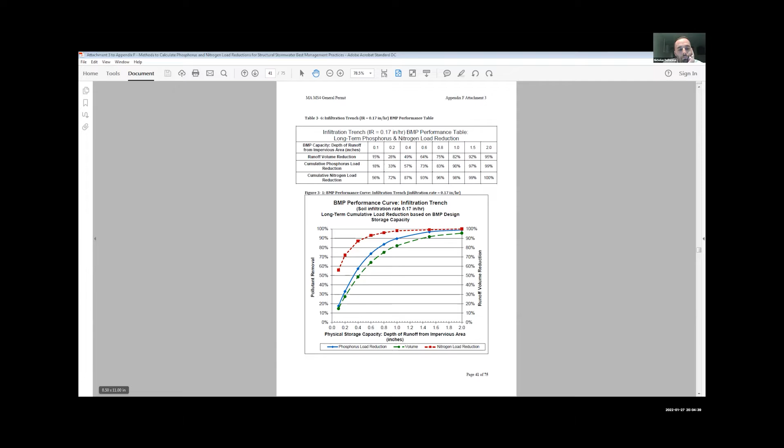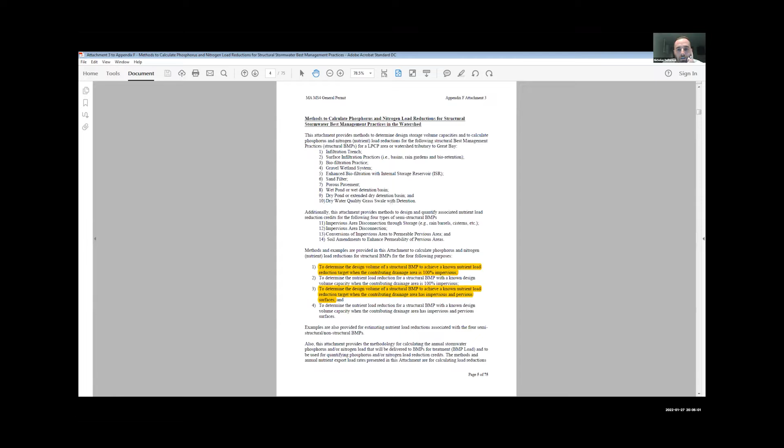I copied those tables onto our Excel file. Yeah, so you put them in the stormwater report, because I'm looking at it, right? That's where I got the number. I did. And so this whole PDF, this is in attachment 3 to Appendix F. You can find this online. It's provided by the EPA, and it goes through the whole process of how to calculate the nutrient load reduction for any given site. So these are the loading numbers.

Okay. If it's a commercial industrial use, direct connected impervious, you're going to have a nitrogen load of 15 pounds per acre per year. So you would multiply that number times the area for that given use and cover type. If you have pervious surfaces, you're going to use these numbers based on the soil type, A, B, C, D soils. Right. And that's how those loads are generated.

So right now we have a commercial industrial existing use, multiplied the area of the site, did all the takeoffs for impervious versus pervious cover to come up with that nutrient load. And that's the existing load. There's minimal treatment out there right now. It all just goes off into the resource areas. Right. And then we came back and established a proposed load based on all residential use, broke that up into impervious versus pervious surfaces. So that would be the load without any treatment.

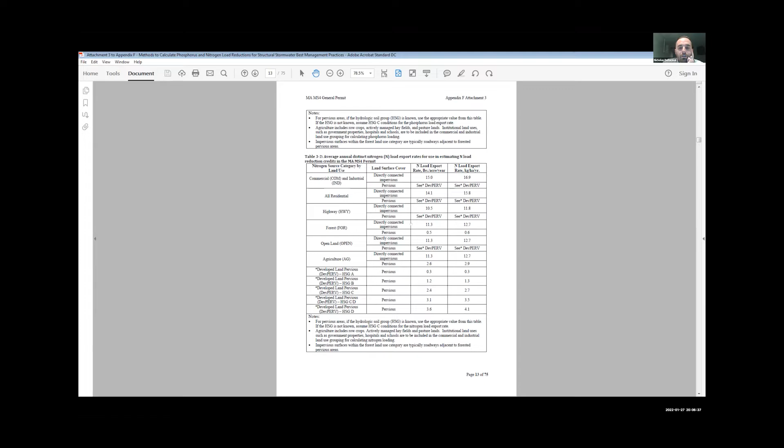Okay, but you're assuming because the buildings and the pavement wouldn't enter into it, or? Well, no, you've got to first establish the load. So once you know the loading that would take place just based off the change in use, imagine if we didn't put any BMPs on site, you establish that load, and then you go and design your stormwater management system, and you use these charts. Wait a minute, is all that you just scrolled through the method that you use?

Do I have that in this report? No, this is provided by the EPA. This is just a guideline. Can you just send me that guideline to Rebecca or something? I can look at it later. Sure. See, the thing I'm concerned about is that these are like numbers that we're not sure we're even gonna attain, right?

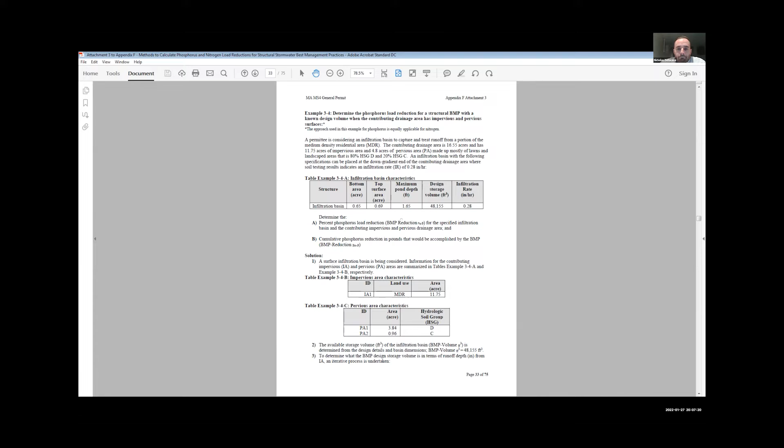In reality, I mean, we are striving to reduce the pollutant intake into the lake. That's a primary objective. And this seems like we're just satisfying a number. Well, this is the way you design it. It's based off of research. I know, but I don't see where you really can say that you have actually reduced it, unless you tested the water. Do you see what I'm saying? Yeah, no, I completely agree. That's the only way to know for sure and to know exactly how much.

And I'm thinking too, in the future, if this project changes, someone might have a different idea of what's beautiful around this lake and decide to fill in all those or pull all the plants out of those basins. And then what have we done to our pollutant loading? I worry about that. Yeah, I see what you're saying, but there's a million things that could happen. No, I know, but practically speaking, you could probably condition it upon that the plantings need to be in there that are provided on our proposed drawings. Well, yeah, and they have to be maintained. If the plant dies, you've got to replace it.

I didn't know if you took this set amount of plant material and could assume that you get X amount of phosphorus or nitrogen removal. And then you figured out how many plants you needed to do that. And that's how you get your planting scheme. But that's evidently not the way it works. No, so this is a chart that shows it's kind of lumped in.

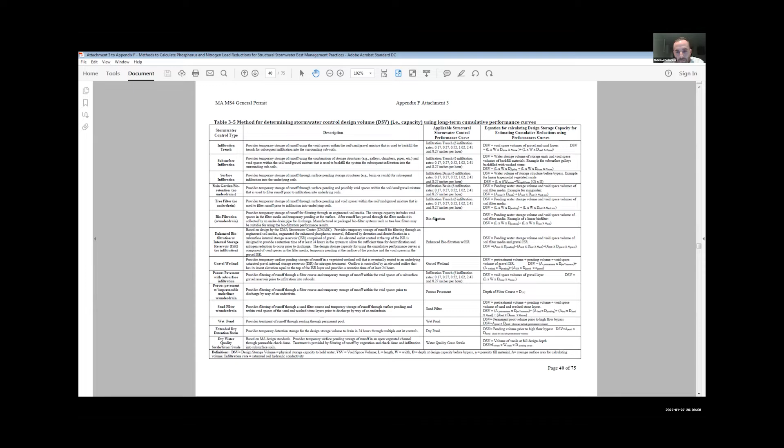So if you're using a subsurface infiltration, they tell you to use the chart for infiltration trench. If you're using bioretention, they have you use the biofiltration chart, and these are the different charts. And so the plantings that are required in each of these BMPs are outlined in the Mass DEP handbook. Yeah, I saw that. So this is kind of building off of that. They're assuming that you're already constructing your... Right.

BMP correctly. And if they tell you what plants you should be putting in there, there's like 3 pages full of plants that can go in. And I'm assuming that your landscaping people are consulting that list to figure out what plants are going to go in there or what would be best in there, right? Yep, that's correct.

Well, let me ask you something else. I noticed when reading the stormwater management for the 2 methods that you're using, I think one was wet basins and the other was bioretention areas. So the wet basins, they were talking about a very deep hole, like at least 1.5 to 2 meters deep. But they also mentioned that they had shallow methods. So which method would you say that you're using? Because some of them seem like they're going to be in the water table. That's why I was questioning the water table elevation.

They're designed to be in the water table by design. But the wet basins are open water and they're vegetated along the banks. Is that correct? Can you repeat that? Sorry. The wet basins, yeah, they're designed to have standing water in them, that's correct. So, but they are talking about depths that put you in the groundwater. Yes. Okay, unless you have another method, which I think they were hinting at in the regulations, but they really didn't go into detail about it. Maybe you're using a different method.

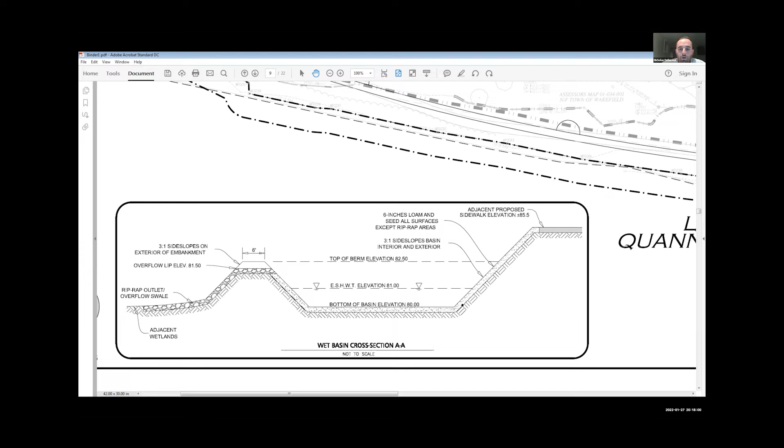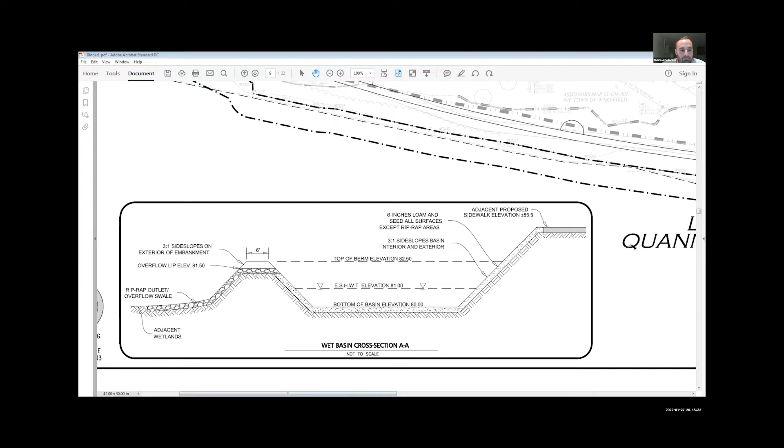But are you calling this a wet basin? It's not really a wet basin though, right? Because it doesn't go along with the regulations, does it? No, it's a hybrid approach to a wet basin. Okay. And we're taking reduced credit for these wet basins around the Parkway. Well, how much is the reduction, and from what? Based on the EPA calculation. So I can find, just bear with me for 1 second.

I'm gonna pull up a peer review memo from the town engineer, Bill. If it's Bill's peer review, I've already read it. Yeah, and we discussed this exact topic. But that doesn't mean that there wouldn't be more questions. That's why we're having a hearing. Yep, and I'm trying to answer that question.

Because you label these different things on your plans. You don't call them the same thing. Well, they're not all the same thing. That's what's getting confusing, because I don't know which one is supposed to be best management practice. Aren't they all best management practices that you're using? Yeah, they're all best management practices. The chambers are a best management practice, the bioretention is, the infiltration basin is, and the wet basin. Okay. But they don't match up with what they're saying they should look like. This is not the correct one.

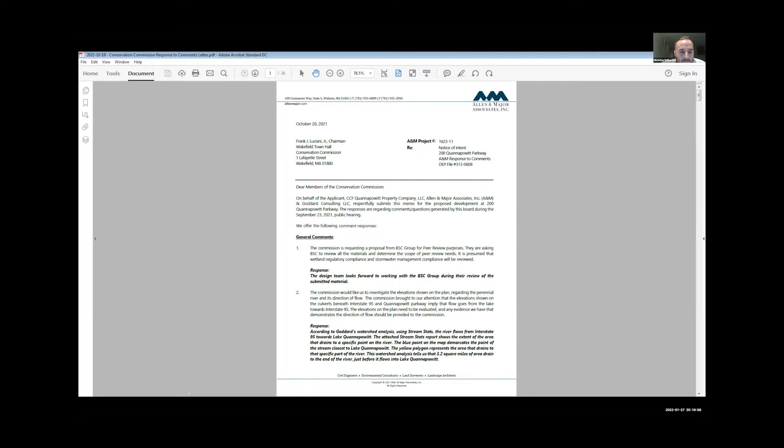Is there a sediment forebay prior to the wet basin? Oh, that was my next question. Yes. Why can't I find this? We had asked a while ago if you had a site that we could look at that you've done all this type of stuff on. You had said there's a lot of sites that you've done. So could you get us a site that we could look at, close by maybe, so that we could see what to expect? Yep, I have that as well. If you just do one question at a time.

I got another question when you get a chance. Okay, so here we go. 0428. Can you see this? Yes. All right, so as far as the wet basins not meeting the exact requirements of the handbook, the reason is the space constraints between the Parkway and the resource areas. This is the comment from Bill Renault's office. He says, none of the proposed wet basins meet the requirements in the Mass Stormwater Handbook, but it is understood that this is a redevelopment aiming to treat stormwater runoff to the maximum extent practicable. Yeah.

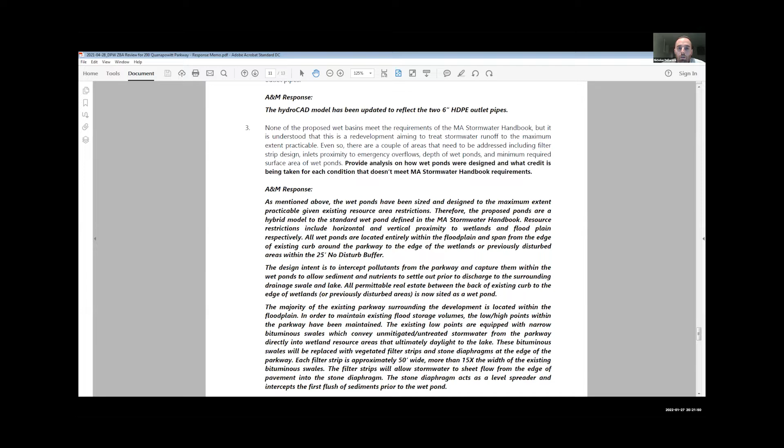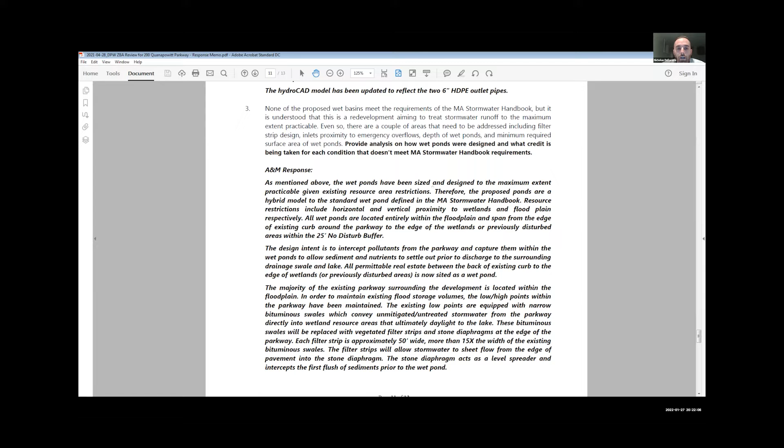Even so, there's a couple areas that need to be addressed, including filter strip design, inlet proximity to emergency overflows, depth of wet ponds, and minimum required surface area of wet ponds. Provide analysis on how wet ponds were designed and what credit is being taken for each condition that doesn't meet Mass Stormwater Handbook requirements. And I don't know if you've seen this response memo before. This was actually provided during the ZBA process.

But we responded, the wet basins have been sized and designed to the maximum extent practicable given existing resource area restrictions. Therefore, the proposed ponds are a hybrid model to the standard wet pond defined by the Mass Handbook. Resource restrictions include horizontal and vertical proximity to wetlands and floodplains respectively. All wet ponds are located entirely within the floodplain and span from edge of existing curb around the parkway to the edge of the wetlands or previously disturbed area within the 25-foot no disturb.

The design and intent is to intercept pollutants from the parkway and capture them within the wet ponds to allow sediment and nutrients to settle out prior to discharge to the surrounding drainage swale and lake. All permittable real estate between the back of existing curb to the edge of the wetlands or previously disturbed areas is now sited as a wet pond. The majority of the existing parkway surrounding the development is located within the floodplain. In order to maintain existing flood storage volumes, the low high points within the parkway have been maintained.

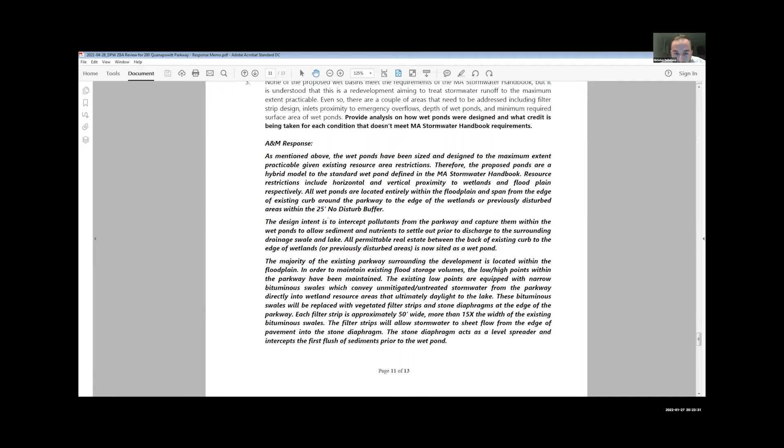Let me kind of skim through. Let's see. Strips. Okay, the next page has the breakdown.

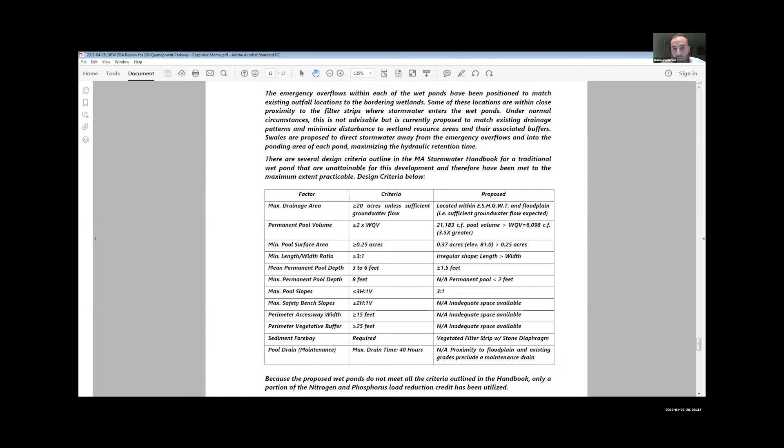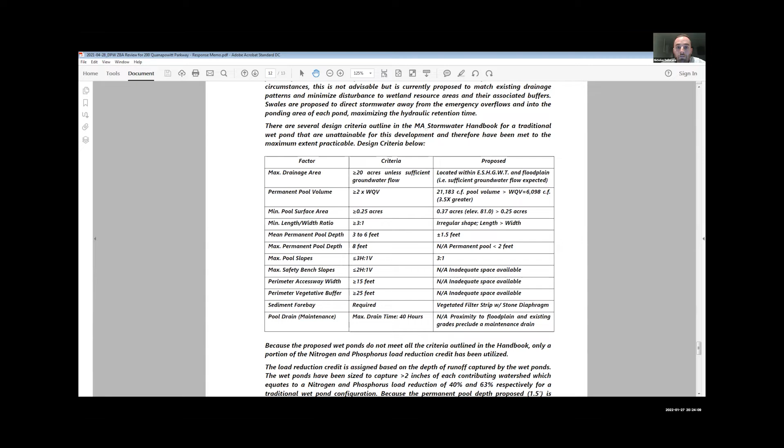The emergency overflows within each of the wet ponds have been positioned to match existing outfall locations to the bordering wetlands. Some of these locations are within close proximity to the filter strips where stormwater enters the wet ponds. Under normal circumstances, this is not advisable, but it is currently proposed to match existing drainage patterns and minimize disturbance to wetland resource areas and their associated buffers. Swales are proposed to direct stormwater away from the emergency overflows and into the ponding area of each pond, maximizing the hydraulic retention time.

There are several design criteria outlined in the Mass Stormwater Handbook for a traditional wet pond that are unattainable for this development and therefore have been met to the maximum extent practicable. And that was that table you saw in the handbook earlier. We were kind of flipping through those pages. There was a table there. Yeah. This is that exact table. We just copied it over and I went through the criteria and then what's actually being proposed.

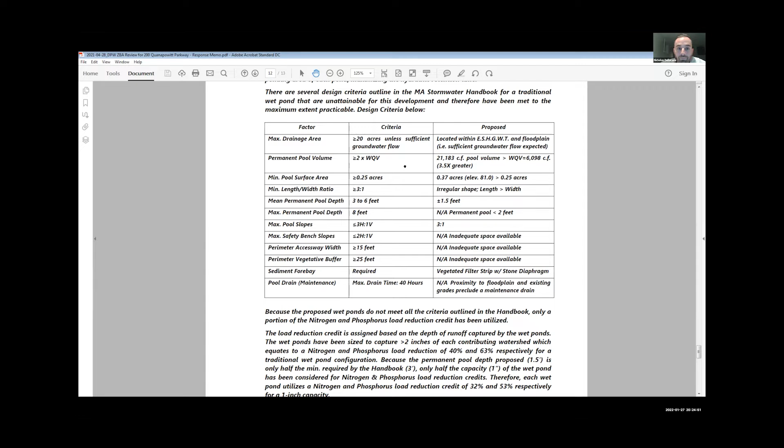So max drainage area, handbook requires greater than 20 acres unless sufficient groundwater flow. We're proposing the wet basins, they're located within the seasonal high groundwater and the floodplain, i.e. sufficient groundwater flow expected. Permanent pool volume greater than 2 times the water quality volume is required. We have a 21,000 cubic foot pool volume, which is greater than the water quality volume, which is only around 6,000 cubic feet. So it's 3.5 times greater. So it well meets that standard.

Minimum pool surface area, greater than 1/4 acre. We have about 0.37 acres, which obviously meets that requirement. Minimum length to width ratio, greater than 3 to 1. We obviously have irregular shapes, but the length of these is greater than the width. Mean permanent pool depth, 3 to 6 feet. We're only proposing 1.5 feet, given the space constraints and how quickly we can grade that slope down. Max permanent pool depth, 8 feet. Obviously, we don't have that issue because we're not even close to 8 feet.

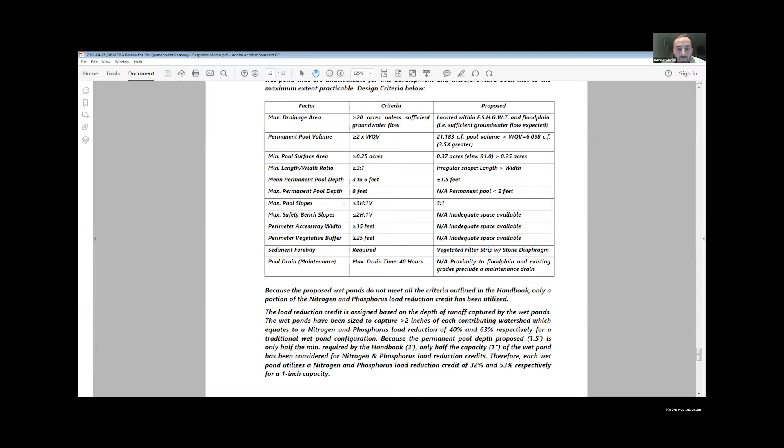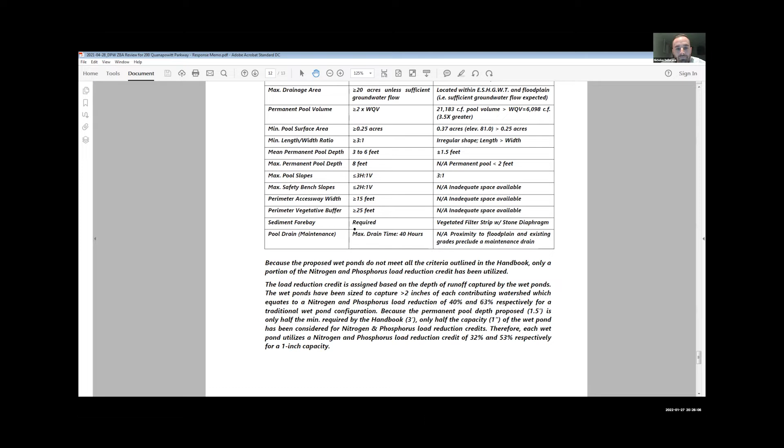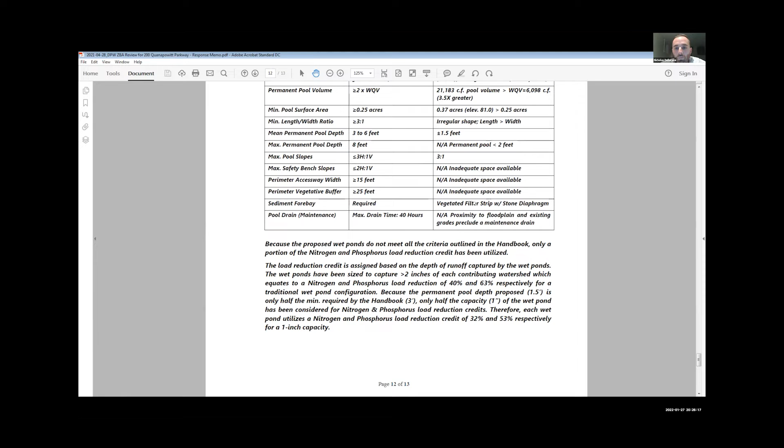Max pool slopes, 3 to 1. We're proposing 3 to 1. Max safety bench, 2 to 1. Not applicable. We don't have enough space. Same with the perimeter access way and perimeter vegetated buffer. We just don't have the space between the edge of the parkway and the wetlands. As for the sediment forebay, it is required. This was an old memo. We were proposing the vegetated filter strips with the stone diaphragm, where we now have sediment forebays at all but one of the wet basins.

Pool drain, max drain time 40 hours. It's not applicable. And this is where we get into what sort of reductions in credits we're taking based on the EPA's calculations. So because the proposed wet ponds do not meet all the criteria outlined in the handbook, only a portion of the nitrogen and phosphorus load reduction credit has been utilized.

The load reduction credit is assigned based on the depth of runoff captured by the wet ponds. The wet ponds have been sized to capture greater than 2 inches of each contributing watershed, which equates to a nitrogen and phosphorus load reduction of 40% and 63% respectively for a traditional wet pond configuration.

Because the permanent pool depth proposed, 1.5 feet, is only half the minimum required by the handbook, which is 3 feet, only half the capacity, 1 inch, of the wet pond has been considered for nitrogen and phosphorus load reduction credits. Therefore, each wet pond utilizes a nitrogen and phosphorus load reduction credit of 32% and 53% respectively for a 1 inch capacity. Now you might say 32 isn't half of 40 and 53 isn't half of 63. But if you look at

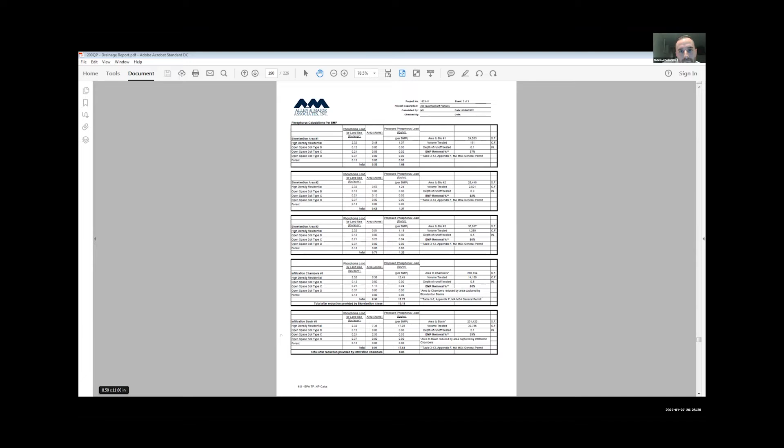To find the drainage report. Let me share this. This goes back into, oh, sorry, actually, it's on this sheet. They're not in there. Okay, but aren't you really getting these? I mean, you've modified every standard out there to make this thing fit. So I don't know what to say about that. Let me show you. Let me just finish this sentence real quick.

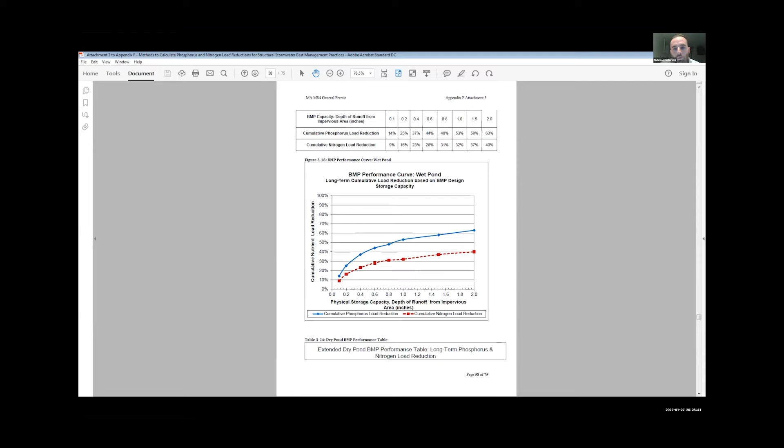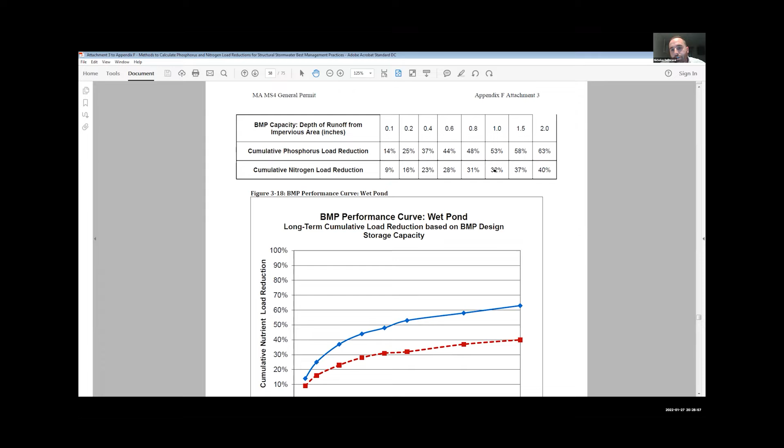So here's your wet pond. So we sized these ponds to hold a 2-inch volume, which gives you the 63 and the 40%. We're only taking half the credit, so 1 inch. So if you hold 1 inch, you get 53 and 32% reduction. That's where those numbers come from. Okay.

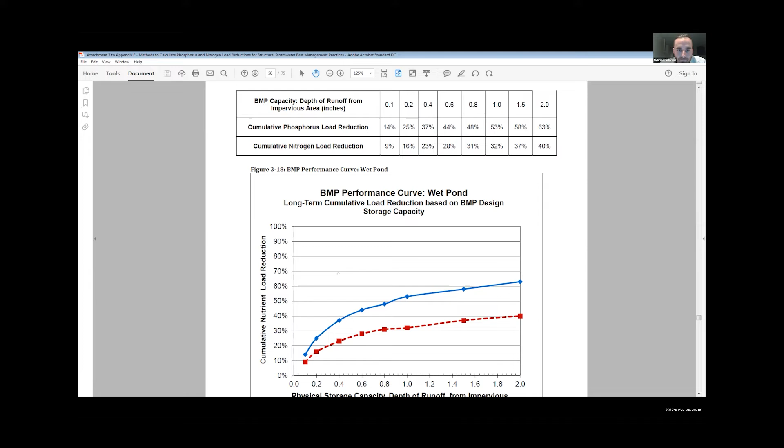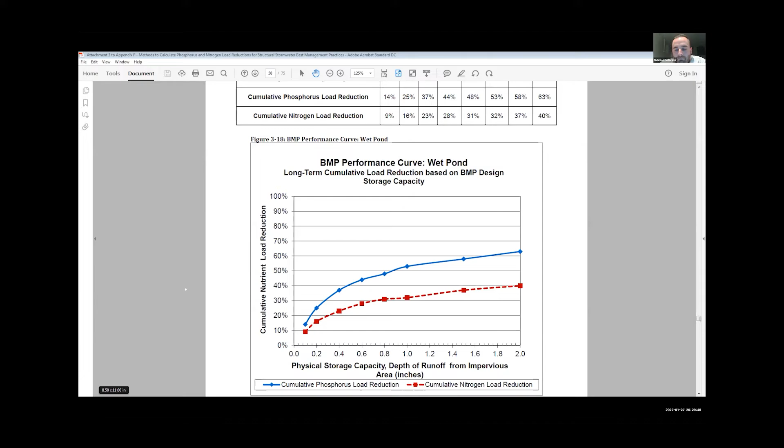But let me ask you something. If you made them smaller, could you stay further away from the wetland and still meet these requirements? I mean, you're right out to the limit everywhere you could go, everywhere around the building. I understand why you're doing that, but if there was a way to stay further away from the wetland with your alterations, could it be achieved?

In some locations, I suppose you could make them smaller, but then they're pretty small at this point. So you're not really getting much treatment, and what is really the purpose of them at that point? Then you're better off just letting it dump right into the wetlands as it does today with no treatment, and you're gonna get all that sediment into the resource areas.

Wouldn't it just mean that there might be a little bit more volume in the retention areas than you would have had? You mean in the chambers and the infiltration basin? Not so much the chambers, but the wet basins in front of the building. This is all wet basin in front of the building, correct? It's an infiltration basin. It's meant to be dry and infiltrate. Is that getting planted with vegetation along the banks? Yes, we went over all the landscaping at a previous hearing. Ian Ramey from Copley Wolff went into in-depth discussion on the planting plan for the entire site.

But my point is, you can't get the water from the Parkway over here. The elevations don't work. That's the whole reason for constructing these wet basins. They only handle runoff from the Parkway because the Parkway is within a floodplain. You can't raise the Parkway to get it to drain anywhere else, or you're filling the floodplain without any compensatory flood storage. The only mitigation you can propose here are these wet ponds at the backside of the Parkway.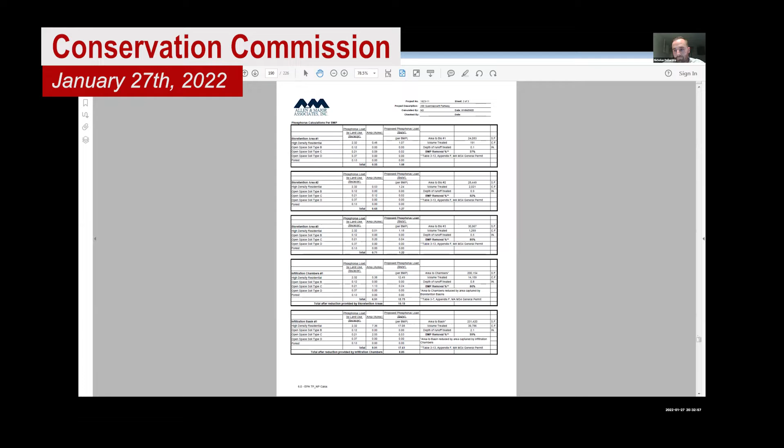And you've got a drainage area in there. What are you doing to maximize the discharge points that are existing so that we have the same volume of water heading into these areas? Because that's a wetland over there. I'm sure if I studied this thing, you've got pipes and manholes and stuff like that everywhere. It would tell me, but are we taking water away from there that might affect the wetland's ability to sustain itself?

Nope. So right now, all of the runoff that comes from the existing site ponds in this back corner, like everyone's aware of. There's a little overflow in here that goes into that back swale. That back swale fills up and it goes counterclockwise around the site. It doesn't reach this wetland.

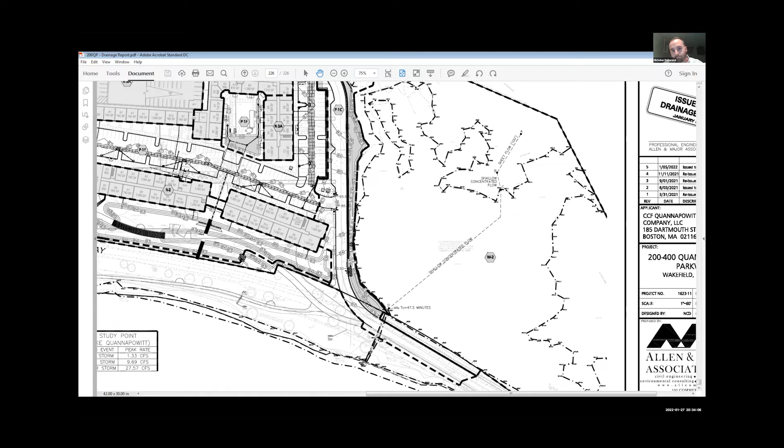I know that. But that is a wetland as it runs along the line of the building. That's a wetland there, isn't it? Right here, this is a wetland. No, go up to the top of the page, I can't show you on mine. Yeah, right in that area there. Isn't that a wetland that's running along the fence parallel to the highway? Yes. Okay, so the water that comes out of this area goes down, like you said, flows along the building.

You've got this one, this is the proposed drainage areas, right? Yes, this map that you're showing. So on the existing, it shows a big area in here that feeds this one spot where it goes along the building. Have you tried to maintain that somewhat? So does this drainage area that you're showing now represent the same volume that would go to it in the existing conditions?

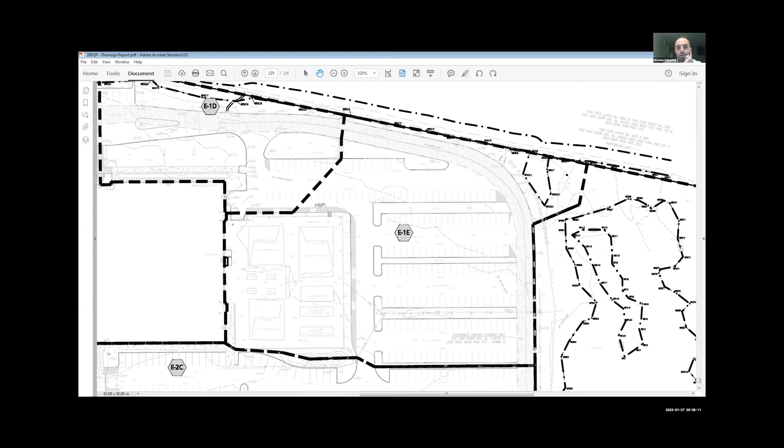No, it's being reduced because it's being captured on site and infiltrated into the groundwater. Okay, but is that a good thing to do? Yes, you're treating it and putting it into the groundwater rather than letting it discharge directly overland into the wetland, carrying all the pollutants. Well, where does that area that you're showing me now discharge to?

So within the Parkway, there's a high point right where my cursor is here. It climbs up to the driveway entrance, and then it goes back down. All of that goes into a vegetated filter strip right here. This is the one vegetated filter strip that we have on site, mainly because we don't have room to provide a sediment forebay in this area. So water goes into this filter strip, comes into the wet basin, and fills up all the way into the back here. Eventually it'll reach about 6-inch to 12-inch ponding depth and overflow as it does today into the drainage swale.

Okay, so if you're trying to match volumes going into these certain areas, how close would you say you are between the existing and the proposed drainage areas for that location? You know what I mean? I'm saying that you showed me how the street goes down, and when it gets to this vegetated area, it goes into the brook along the highway chain link fence, right? Yep. So you've got another wet basin here that's parallel to the building. That water goes into it as well? That goes into this one vegetated area, this triangular piece that you said you couldn't put a forebay. Yeah, it's actually over to your right.

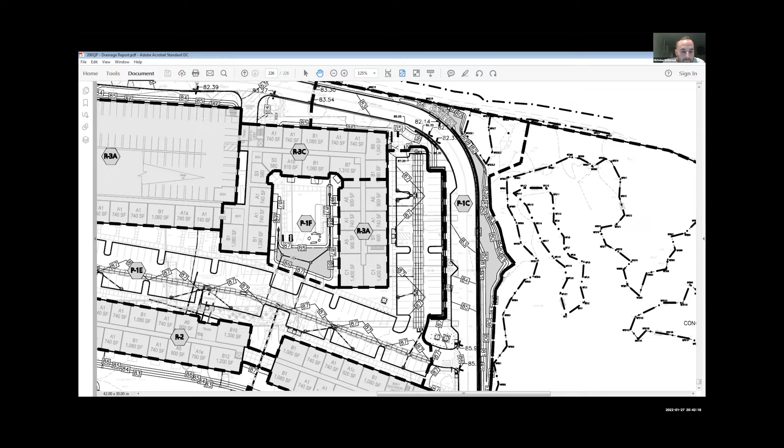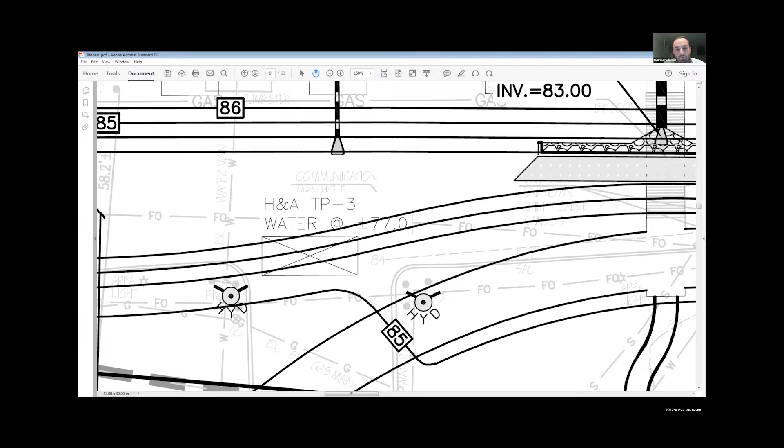Can you show the locations of the test pits on the site plan? Yep. Let me pull it up. Can you see my screen? Yes. So there's a test pit here, it's blocked off by the text. There's one performed here, the H&A. There's test pits here, H&A TP3; for instance, they established the seasonal high water at 77 at this location. Like I had said, there were a couple that were much lower.

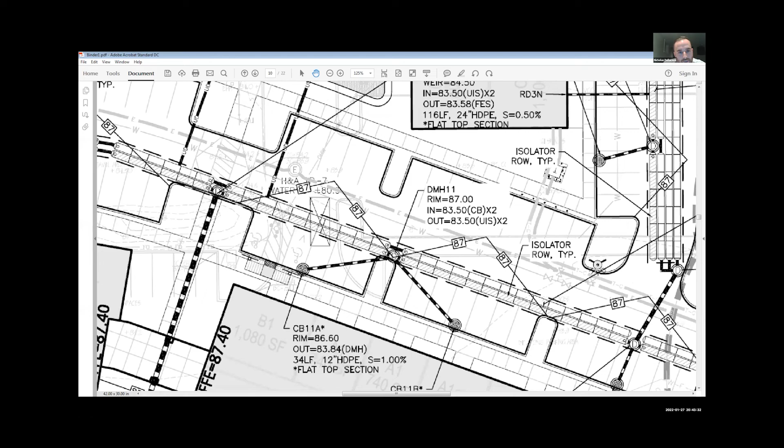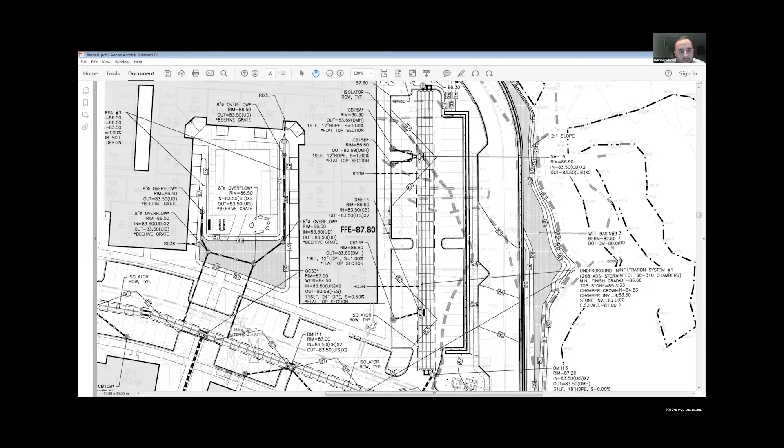Go to the next sheet. H&A TP5, water at 80.2. This isn't the one, but this is TP6 at 80.1. There's H&A TP7 at 80.3. There should be another one up here. I think it falls underneath the building. Those are some of them. There's another one, TP4. So you can see they were done all the way throughout where we're proposing the infiltration on the site.

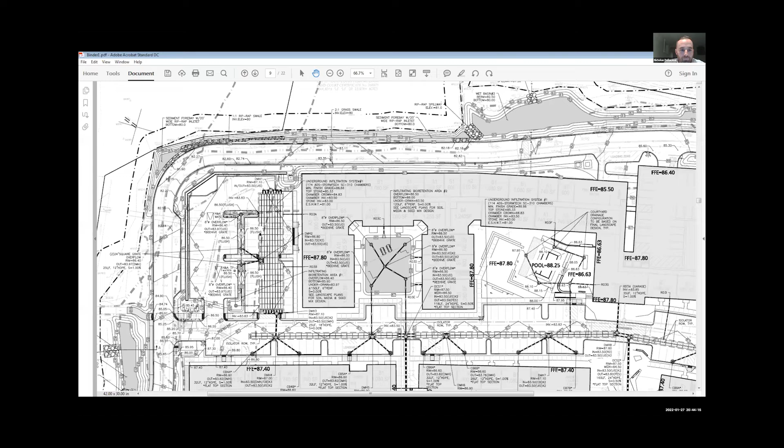That brings me to another question. Do you know which way the groundwater is flowing from your property? The groundwater itself? I don't know the answer to that question. I would assume it flows towards the lake. It could be towards that no-name stream as well. We haven't performed any sort of groundwater migration analysis. Okay.

Another question I have for you is, all of these wet basins get vegetated, right? Correct. And some of them now you're saying are not deep, maybe 1.5 feet deep, something along those lines. Is that correct?

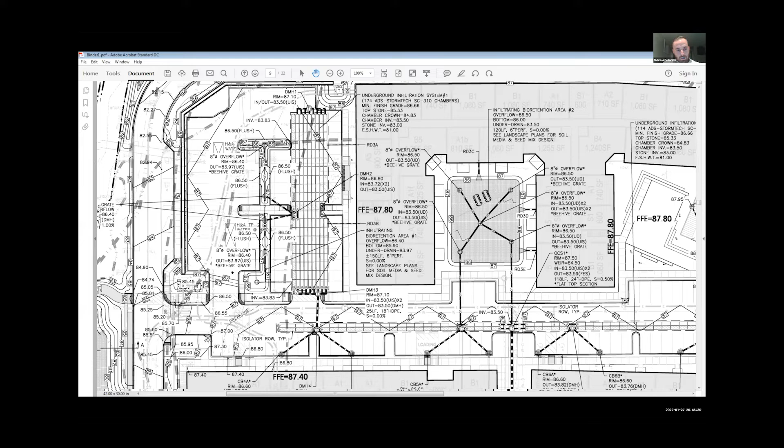These wet basins. Yes. Okay. So how do you, and they're at different elevations, right? I mean, some are down low, some are up high. The wet basins, yep, they're all pretty much around the same elevation. Bottom of this one's at 80. Berm's at 82.5. We have this one at 80, berm's at 82.5. They should all be right around the same elevation.

80, okay. 82.5. So in times of drought or stuff like that, do you need to provide water to these plants that are down there? Because you're well above the, I mean, what'd you say was the 100-year flood elevation? 83? 81 was the established seasonal high water. Oh, that's the groundwater high. What's the flood elevation? 83, right? 83. 83 and 81. So if you're at 81 and all your plants are at and the groundwater is at 81.

I guess my question would be, do you have to supplement these areas with water at dry times to keep the plants alive, or will they survive anyways? No, so there's no significant plant vegetation proposed in the bottom of the basin where there's going to be standing water. No, but there would be up on the banks, right? Yeah, I believe Copley Wolff is proposing some whips in there along the banks. Right.

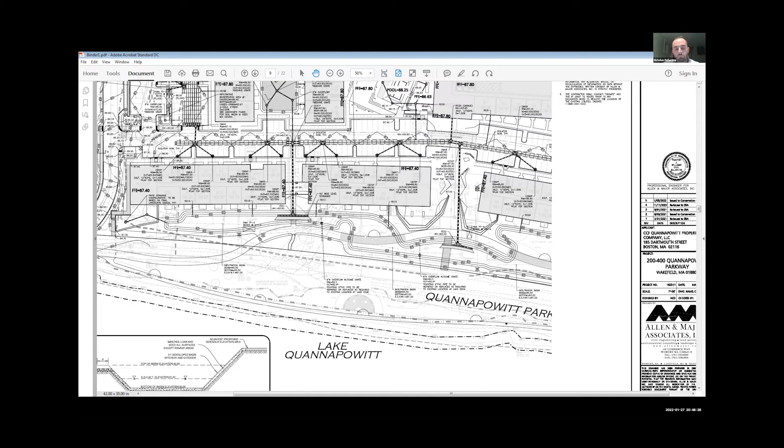Can never hurt. If the bottoms of these basins, like the ones on the Quannapowitt side of the building, are they just gonna be mulched? Which basins are we talking about? This basin in the back? Stop moving your hand there, actually, you're in the right spot. Those there. So the bottom of those is what, 81.5? No. These are infiltration basins. They're at 83. They're above the groundwater table. They're meant to be dry, and these will have plantings in them. Okay. So the whole bottoms of those are gonna be planted. I'm trying to visualize what this is gonna look like when it's completed. Are these high plants like grasses?

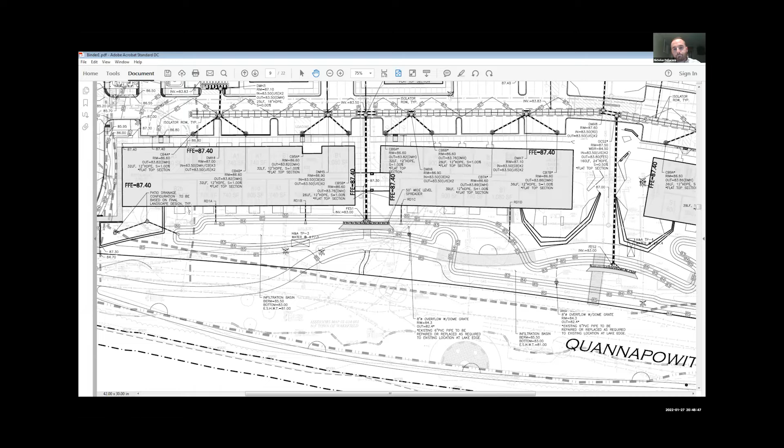Yeah, Copley Wolff went over a pretty in-depth presentation on them. Well, not renderings, really. I don't have that information with me tonight. Okay. I don't think it was that in-depth because I wouldn't have this question if it was. I think he went over everything kind of. Probably did it in an hour. Okay, so those are dry. Those are completely dry. And they're gonna be like little gullies, like a dry river.

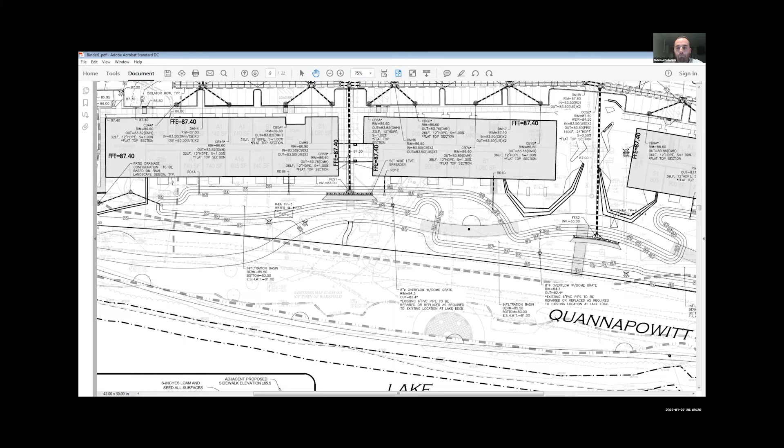Is that the same thing on the highway side of the building? No, those are wet down on that side. Everything on the outside of the Parkway are all wet basins, because they're within the floodplain. These are bioretention areas within the courtyards. We have the underground chambered systems underneath the parking, and the large infiltration basin along the back of the site. The only thing that's meant to hold water are the wet basins beyond the Parkway.

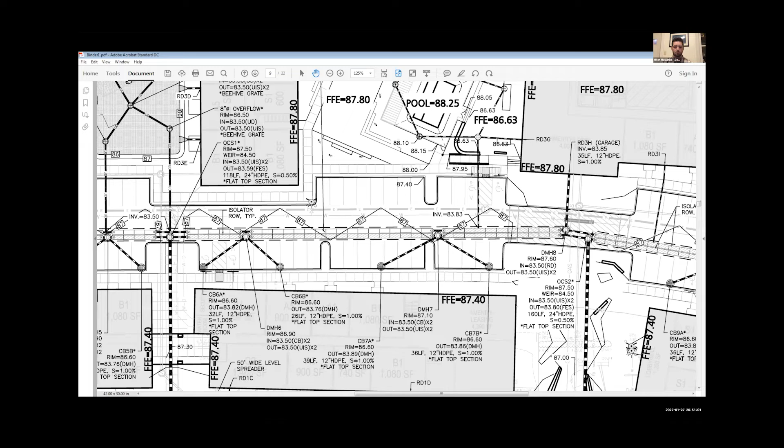So I should know this, but I'm gonna ask anyways. You have regular manholes scattered throughout this property, right? Yep. Is that a system by itself? What does that empty into? I'm sure it's on the plan, but it's easy if you just show me. Like these manholes?

Yeah, you've got a bunch of manholes. Yep, so they're catch basins. So these catch basins, and that's dirty water, basically, right? We're gonna say it's dirty water because it's gonna be from this car park there, correct? Yep. Yeah, so that's dirty water. So what are you doing with the dirty water?

So the dirty water gets captured into the catch basin, deep sump catch basin, 4-foot sumps. They're equipped with hoods on the outlets to help trap the floatables and any sort of petroleum-based products. Goes into the drain manhole, and they're connected into these isolator rows. And those isolator rows are designed to capture that first flush of pollutants before it ultimately overflows into the rest of the chambered system where it can more easily infiltrate right into the ground.

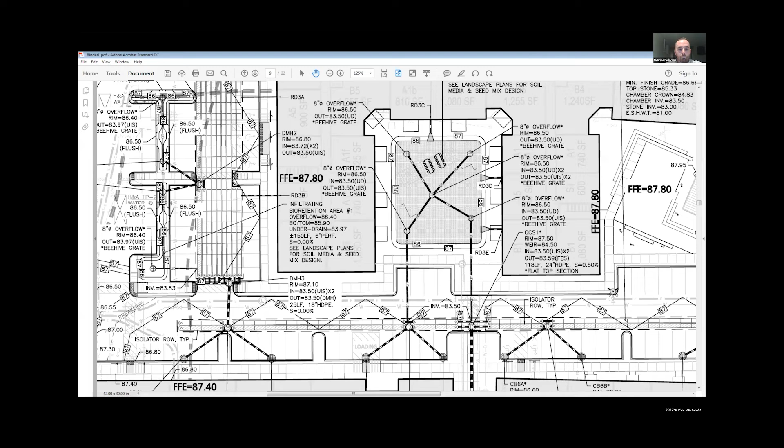Okay, so those are Caltech chambers also then, is that right? Yeah, they're not Caltech, they're StormTech. But it's the same thing, that style, right? Yep. So, now you're above the groundwater there, correct? Yep. So those are gonna flow down to the groundwater and then filter through whichever direction the groundwater is moving. Which we don't know.

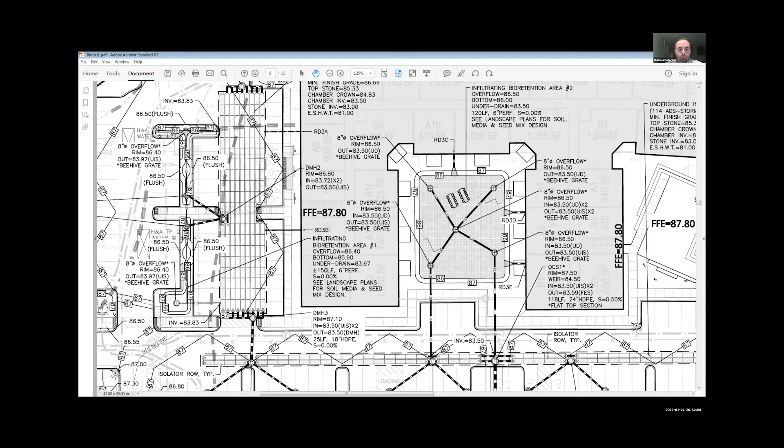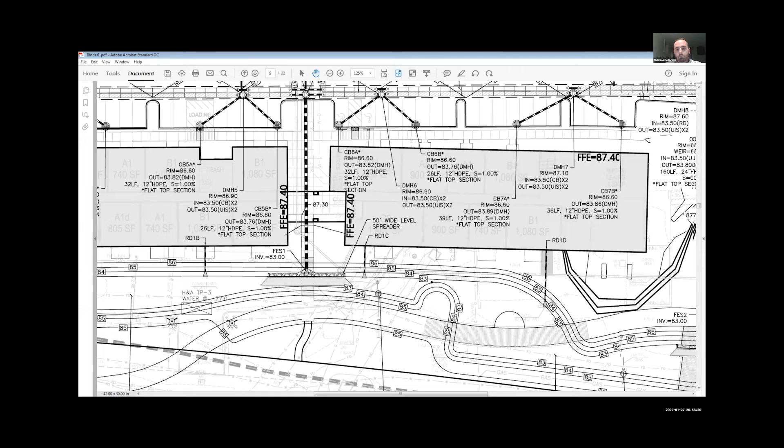And under large storm events, when these infiltration chambers get overwhelmed, I believe there's 3 outlet control structures. You can see this manhole here. It's connected to a larger pipe that dumps out into a level spreader that goes into these infiltration basins out back. And there's 3 of them. There's one here, one here, and there's one more on the other side of building or between building 2. Okay.

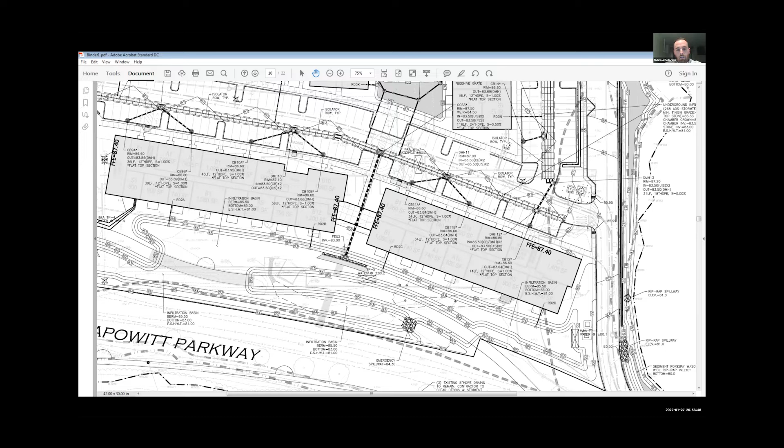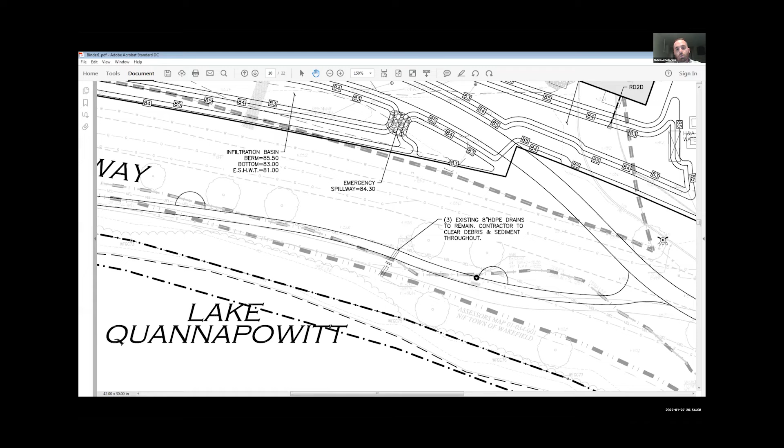All right, and then, of course, everything's intertwined and connected. So under even larger storms, the infiltration basin will fill up and it will maintain the same drainage patterns that exist today. It overflows at this emergency spillway here. And then discharges into the existing 8-inch HDPE pipes that pass below the existing walkway and into the lake. Right, those are pretty large storm events to have it do that, but it is there as like a fail safe.

Yeah. So do you have any? Never mind. So that's what I was getting at, all right, never mind, I'm done right now.

Anything else about the resource areas? I didn't mean to hijack this whole thing with stormwater. Yeah, Mitch, I don't know if you want to continue on going through the comments. Sure. That was the purpose of this whole hearing. Well, it was the purpose, but we also gotta look at everything.

Mitch, if I could offer, at this point the next, I think it's 8 comments, are really kind of lumped together in thinking about the buffer zone. And there's really very little intact buffer zone on the site, given the existing conditions. And this project will have pretty significant impact on what remains. So those next comments, I think it's 3 through 11, really focus on the science of buffer zones, how buffer zones function to protect adjacent wetlands.

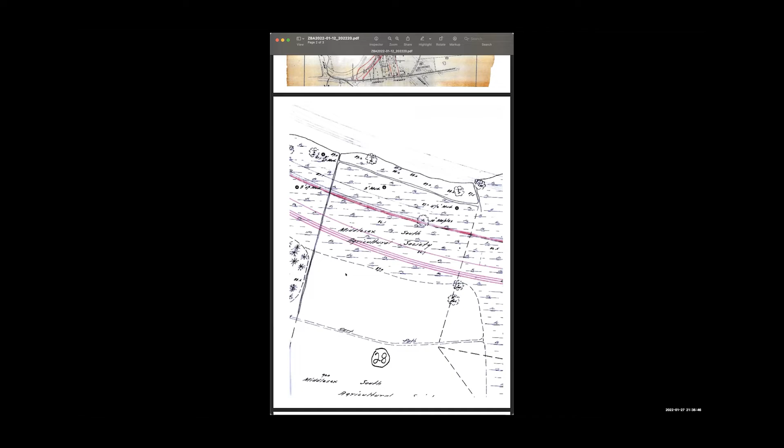And the racetrack, which isn't shown on this map, you can just see it here, the old racetrack. It's called the Wakefield Reading Fairgrounds. And right about here, a pipe comes out underneath. Can you see the cursor? Yes. And it connects. Here's 128, and it connects to this culvert that ran down the side of the Wakefield Reading Fairgrounds. And now there's going to be a third project in addition to Quannapowitt Parkway and 128.

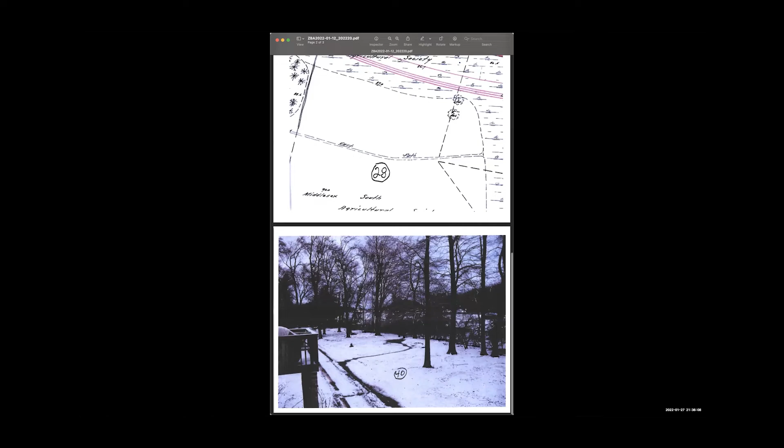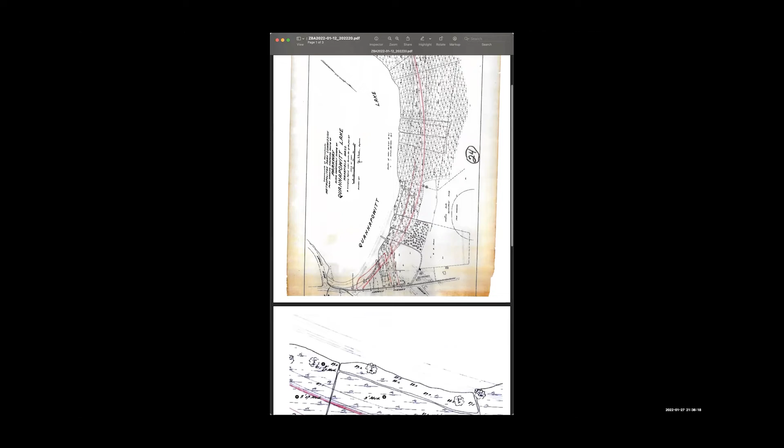And I just want to make sure here you can see the water coming down the side of my house. And this drains the whole neighborhood, not just me. Everyone in the neighborhood should be concerned about this, because the water goes under a pipe underneath 128. Then it connects, or used to connect, to this culvert. And I just want to make sure that the water drains into the lake. I mean, whether it goes along the highway and comes through what used to be the Ash River, I believe. It's also the John River and the Eaton River. And I guess they call it Walker's Brook now.

And so it may go down to the head of the lake now, but I understand that the culvert is now blocked for other reasons, and the water, rather than going downstream to the lake, is forced upstream into the Reading Drainage Canal. And it goes down the Reading Drainage Canal, and then it goes under 128 and into the Saugus River. What I would like, and I think you would like to work with me on this, hopefully, is that I want to make sure that that water still reaches the lake, if that is possible.

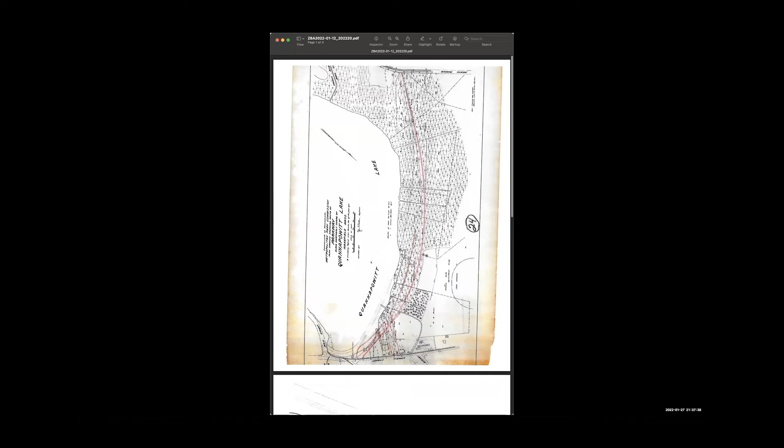Right now, here is a, can you see this? Yes. Okay. Right now, I live on Harvest Road right here. I think I'm the closest house to your property. Dennis, what is the date on this drawing, on this map? This is something I drew myself. It comes from NOAA, National Oceanic and Atmospheric Administration. It's current. This drawing that's up on your computer right now is current? Well, I hand drew this.

What happens now is the water comes down here. It goes under the pipe and it collects. We can't tell where you're referring to. Oh, okay. It collects in a retention pond. Well, here's a retention pond here. But when you say here and things like that, we don't know what you're referring to. Oh, you don't see this map? We see the map, but we don't see a cursor or where you're referring to. Being your map number 24? Yes, it's not page 6.

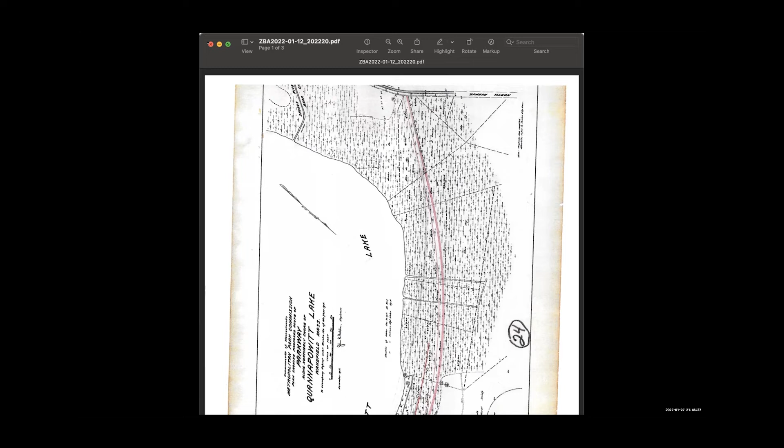Resume share. Oh, there we go. Now, do you see? Oh God. Do you see where Harvest Road is here on this map? Is my cursor going? No, we still see the original file drawing. Quannapowitt Lake Metropolitan drawing. Okay. How about share file? No, that's... well, this is very frustrating.

But what I'm asking is that I prefer that if this project goes through, that water flows underneath the highway and it reaches the lake. Right now, I don't believe it does reach the lake. And I believe it goes down next to one, it collects in retention ponds because I don't believe the Reading Drainage Canal can handle all that water.

So it collects in retention ponds on Quannapowitt Parkway and eventually either percolates into the ground or it goes along the drainage canal down to what used to be the Ash River, which is now called Walker's Brook. And I wonder, is this river that used to flow the Ash, Eaton, John Street Brooks, which is now called Walker's Brook, is this a river or is it part of the drainage canal? Does anyone know? No, that's on the other side of 128 on the Reading side, correct?

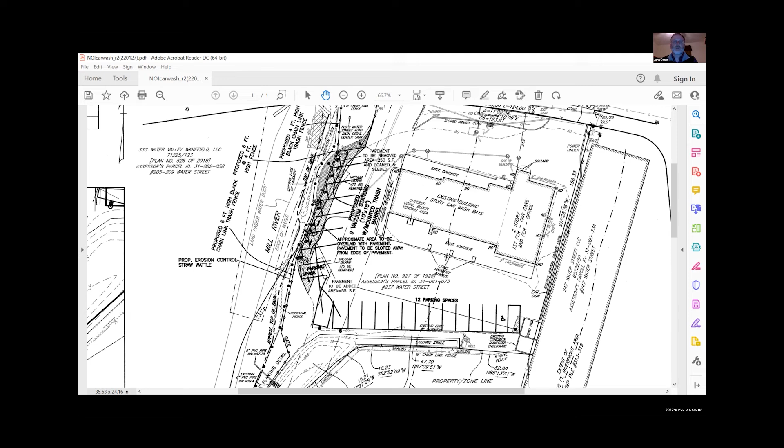And then the last comment was to take a look at the water flowing off of the site, and if there was a way to put some sort of berm or curbing along this edge of the existing pavement, or the proposed edge of pavement, basically. And I did take a look at that. I did take a look at the actual spot shots that we had there, and there is an area in here that's a little bit lower, so it doesn't necessarily flow either towards Water Street or back towards the infiltration trench along the back.

So in order to do that, we would have to raise the grade along this edge of pavement. And looking at adding curbing, there's a lot of concern about the amount of impervious area on the site, and we are reducing it.

So curbing along the existing edge of pavement interferes with the vacuum, basically the concrete bases for the vacuum. So we'd have to move those away from the edge of pavement, and then obviously leave some room between the curbing and that concrete base to allow water to flow. So long story short, when I started details, it means that we would have to move everything probably about 2 to 3 feet towards the building.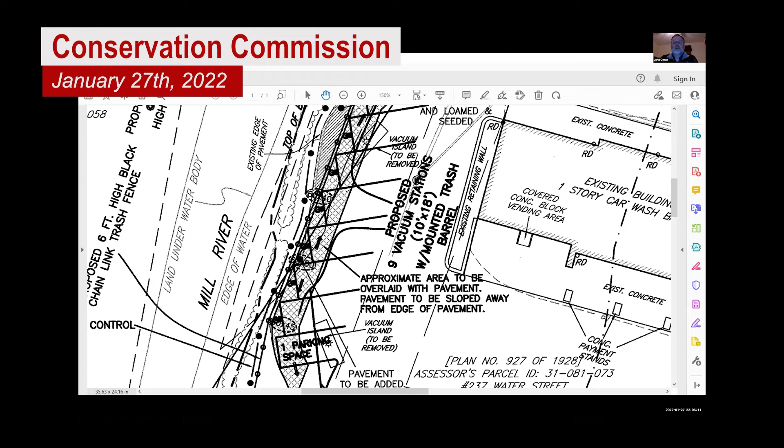Yeah, I mean, it's something, and you're talking about instead of really doing any reworking of the pavement, take that area where the low point is, in the grass area between the pavement and... Yeah, get rid of the grass and put in plants or something, but put a slight depression in there and allow it to fill up with water, and then eventually, yeah, just toward the river. I don't know, see what someone thinks about that idea. I know the other one wasn't too good.

I mean, we're not talking about, unfortunately, a very wide strip to do that. Yeah, I guess they do it in strips like that because of Quannapowitt Parkway, they're doing it all over the place. Anyone have comments or something?

So we're talking a wet basin or a rain garden? Rain garden, not a wet basin. You wouldn't be able to do a wet basin, not without going through a list of things, disclaimers. Yeah, I mean, there's probably about 4 feet or so of width there. Rebecca, what do you think? Are you still there?

I am. John, did you have to go to the ZBA to change this, to have this new plan? We have not been to the ZBA, no. Are you guys planning on going? We are planning on, yes. Okay. We actually have an attorney on board, basically ready to go. We're gonna file. We were trying to get a little further along with the conservation before we went to the ZBA.

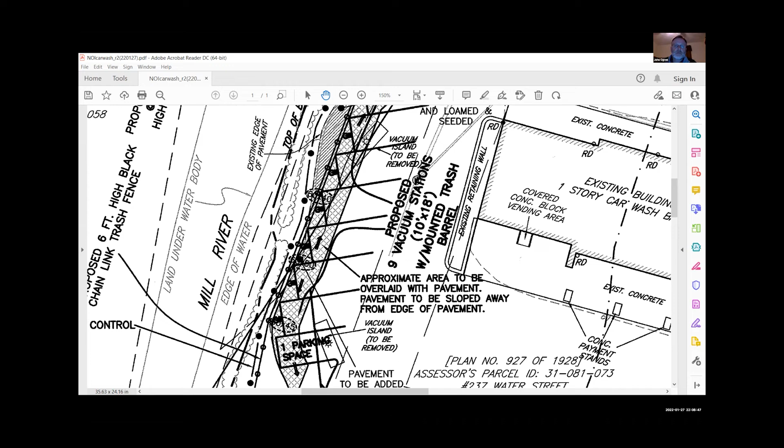Well, we also looked at doing some enhancements. That's kind of why we did the plantings down in here, where there was a section of the riverfront area that there wasn't much in terms of vegetation, and basically trying to make improvements along that part of the buffer or that riverfront area.

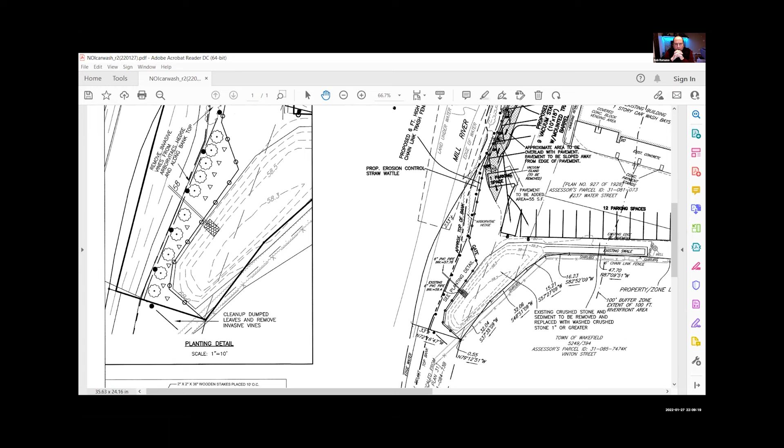Rebecca, I may have missed it. Did you answer Jimmy's questions about your thoughts on what he suggested for the vegetated strip or swale? Nope, I diverted and asked if he had been to the ZBA. Oh. I think you guys should wait until they at a minimum apply to the ZBA, as is typically done and cited in the regulations, and that simultaneously we can have some conversations to see, John, if they need to change that special permit or not.

So when would you apply to the ZBA, let's suppose you got something from the commission? Maybe not until spring, John said, I think. I mean, we would apply, again, I'm a little torn, because if the warrant gets put on spring town meeting, we may not want to rush to the ZBA and we may want to wait to see if that passes. So that means we have some time here then, right? Is there something pressing here? You're planning on waiting a little while.

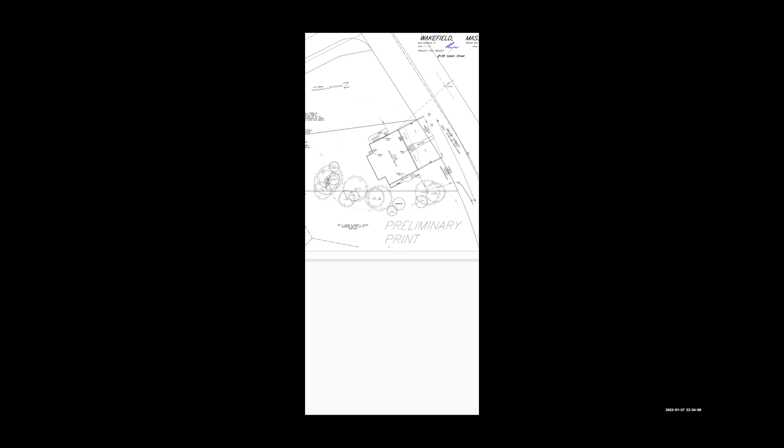Give me 1 second. Can you see this picture? Yes. So I did have the property resurveyed because it's grandfathered non-conforming, as part of the new ownership changes I've made here. These are the 2 trees that are right on the property line on the front right side. The riverfront in question is, this is the second property, this is the railway, and then it's over this to the left here.

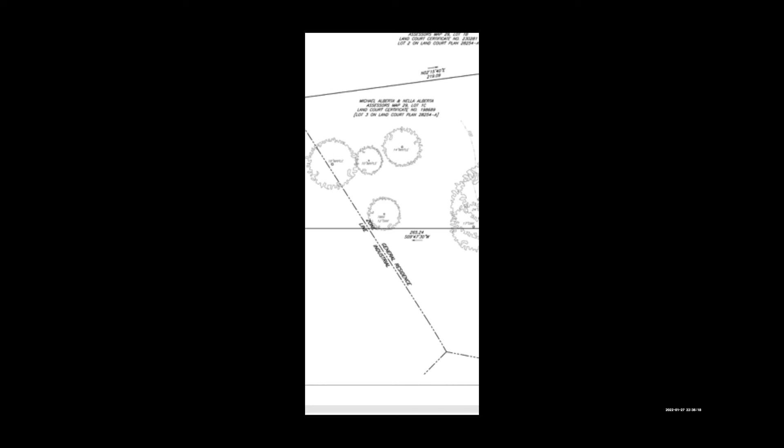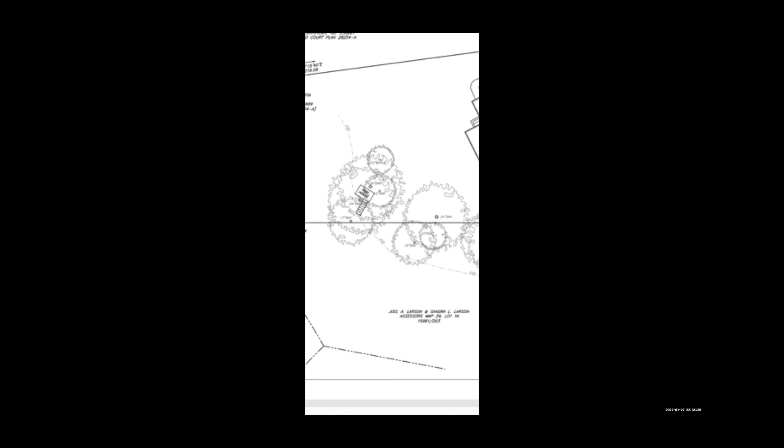There's lots of trees in the back of the property that would exist. If we had to put back some trees, I'm open to doing that. It's just, these are significant trees extending a large canopy, it's shade. I've got mold issues on the back, so I just need to open up this area here. And yeah, so the river is actually 2 properties over. Correct. So none of these trees are providing canopy to a wetland or the river. Correct.

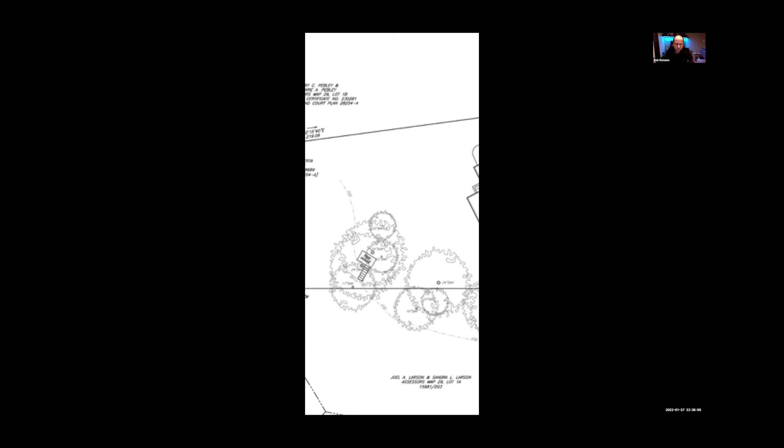Rebecca, what do the regulations say? This is more under your tree policy. Yeah, well, I mean, some of these definitely, I have to believe, are more than 200 feet away. Correct. That was what the surveyor told me myself. I don't have that on this piece because we didn't actually flag a wetland or anything like that.

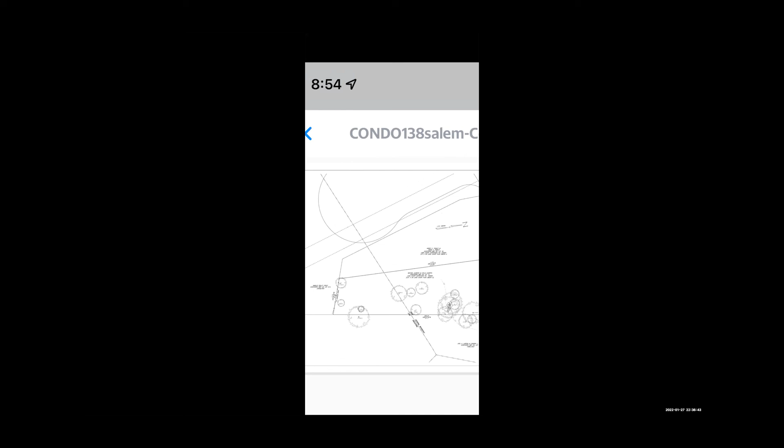So wait a minute, this is the second house. There's a commercial property, a house, and then this property, correct? Correct. There's a house here on the property, and then there's the commercial driveway of the property that goes in the back. This big circle here. Yep. So the riverfront is actually where it says condo 138 Salem there, and that's really where the actual railway is. Right. We actually walked that railway a couple of years ago. Right.

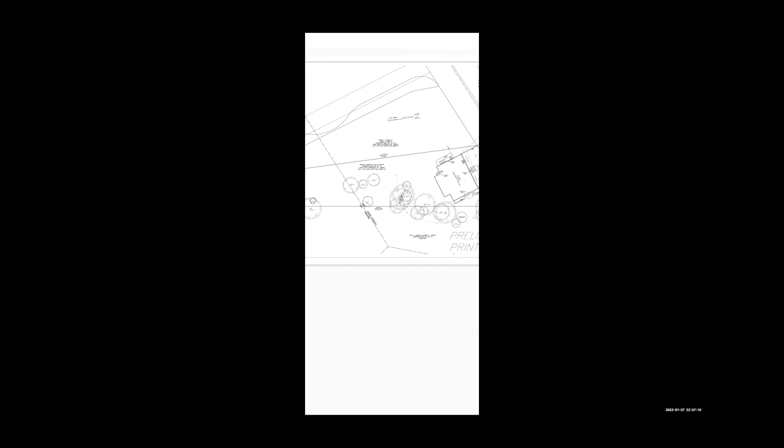It's pretty well cleared over here, and then there's obviously lots of woods still that run all the way through to the back to New Salem Street. That would obviously remain intact. It's really just the large perimeter around the home and trying to open up the backyard a little bit is what we're trying to accomplish. But it's unclear how many of these are within 200 feet though. Yeah, that's what we don't know. So we're at a disadvantage.

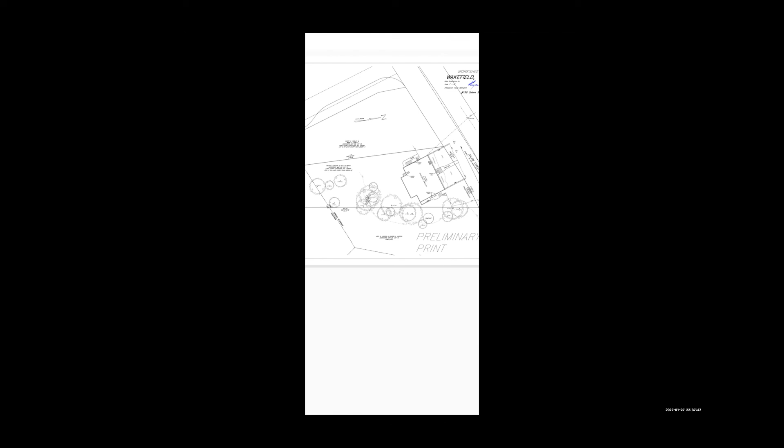I'm more than happy to come back with that. Again, we're not building any, I wasn't aware that that was a necessary thing here coming into that, for each tree. Well, yeah, that determines whether it's jurisdictional or not. That determines whether we can say anything about it at all. If it's not within 200 feet, we have no say in it. Okay.

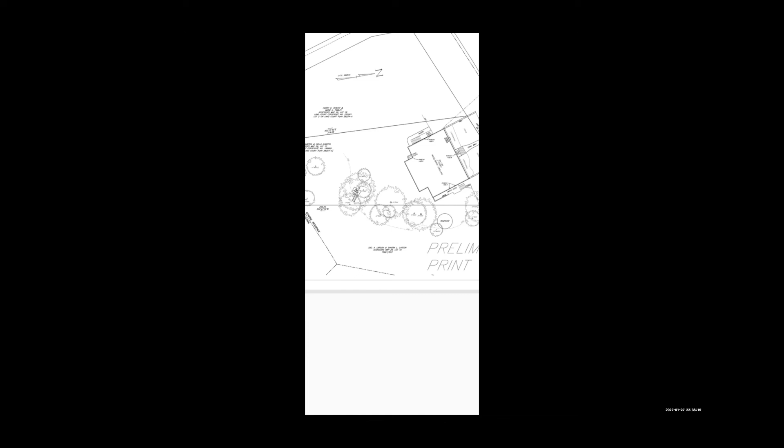Who did the plot plan with the location of the trees for you? If you give me 1 second, I'll give you that. Because they can easily give a 200-foot line off the riverfront area onto this drawing, and that'll answer the question. They may even have some of that information already. We can scale it. I think we lost him. I apologize, I just dropped off. Hayes Engineering is the one that did the survey, so I could certainly follow up with that information. Yeah, ask Hayes to throw the 200-foot riverfront line on the drawing, and that'll answer the question.

It looks like John Ogley is still on the line. Yeah, he's still on. Oh, is John on? Okay. Making connections. John, did you hear all that? He's muted. He never left us. All right, we're gonna move on now. No, I was not listening. I was trying to find out why there was soapy water going out of the bay. You're eavesdropping on us, John. You're spying. We were talking bad about you, and we thought you were gone.

Are you guys talking about 138? Yes, we are, John. Can you put the 200-foot riverfront buffer on that drawing? I can do an approximate 200-foot buffer, yeah. Yeah, that'll work. We haven't really looked at it from a wetlands resource standpoint. Right. We just did an existing conditions plan at this point. So some of those trees may be outside of our jurisdiction. Okay.